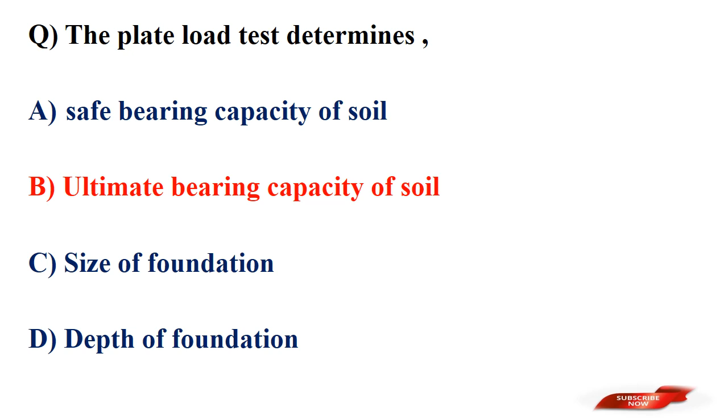Distance between two neighboring brass rings is. Options: less than 20 cm, 1 meter, 20 cm, 5 meter. Answer: option B, 1 meter.

The isometric axes are inclined at a dash degree to each other. Options: 150 degree, 120 degree, 90 degree, 60 degree. Answer: option B, 120 degree. The isometric axes are inclined at 120 degree to each other.

The difference between the most probable value of a quantity and its observed value is. Options: true error, residual error, safe error, conditional error. Answer: option B, residual error.

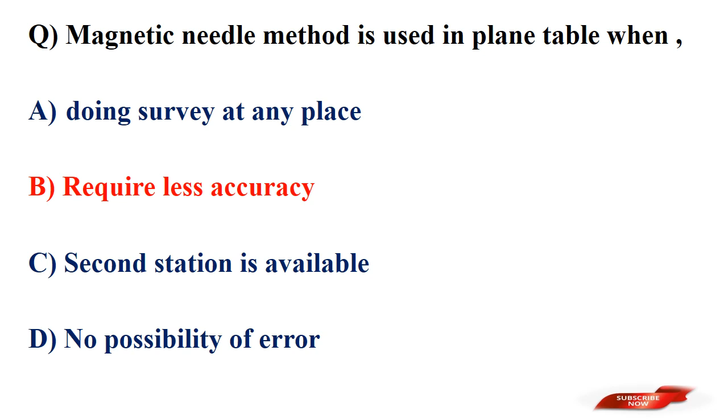Smallest division in the graduated scale of Vicat apparatus. Options: 1 mm, 2 mm, 3 mm, none of those. Answer: option A, 1 mm.

The box of prismatic compass is made of. Options: steel, brass, iron, aluminium. Answer: option B, brass.

Leveling across a river is done by. Options: fly leveling, reciprocal leveling, trigonometric leveling, cross leveling. Answer: option B, reciprocal leveling.

The accuracy of fix by 2-point problem is. Options: unique, not reliable, good, bad. Answer: option B, not reliable.

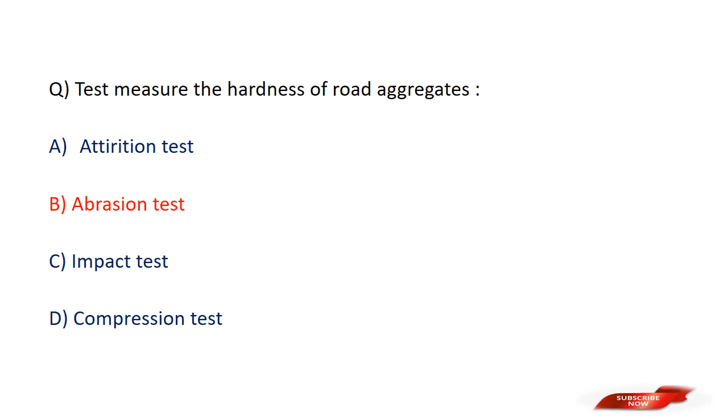Minimum width of stair for a single family. Options: 90 centimeter, 80 centimeter, 75 centimeter, 85 centimeter. Answer option C, 75 centimeter.

Minimum headroom provided for a stair is. Options: 2.7 meter, 2.1 meter, 2.6 meter, 1.8 meter. Answer option B, 2.1 meter.

Plinth should be at least dash centimeter higher than general road. Options: 30 centimeter, 45 centimeter, 50 centimeter, 65 centimeter. Answer option B, 45 centimeter. Plinth should be at least 45 centimeter higher than the general road.

The building plan is a section at the level. Options: foundation, sill, roof and plinth. Answer option B, sill.

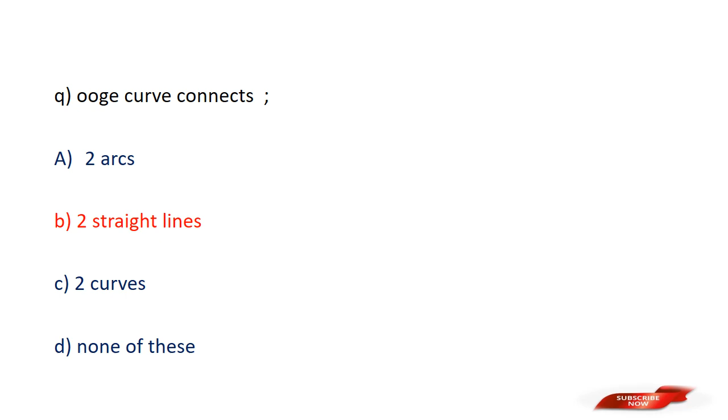Visual ray method. Options: general oblique, cabinet, oblique, perspective. Answer option D, perspective.

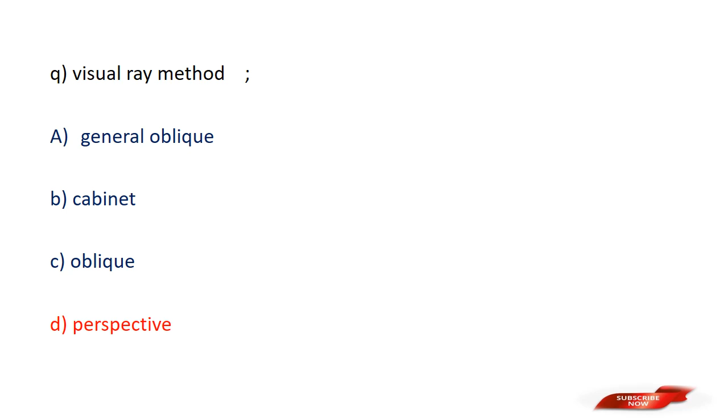Special publications of BIS for engineering drawing practice for students. Options SP25, SP45, SP46, SP65. Answer option C, SP46.

The portion of road surface which is used by vehicular traffic is known as. Options: shoulder, expressway, carriageway, none of those. Answer option C, carriageway.

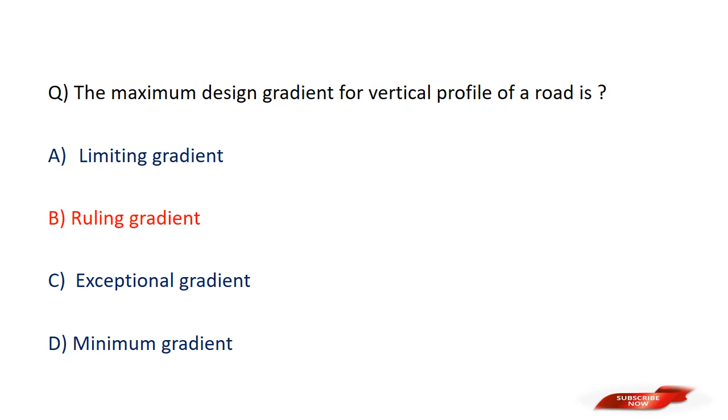Causeways are a type of. Options: side drains, cross drainage structure, jelly drains, subsurface drainage structure. Answer option B, cross drainage structure.

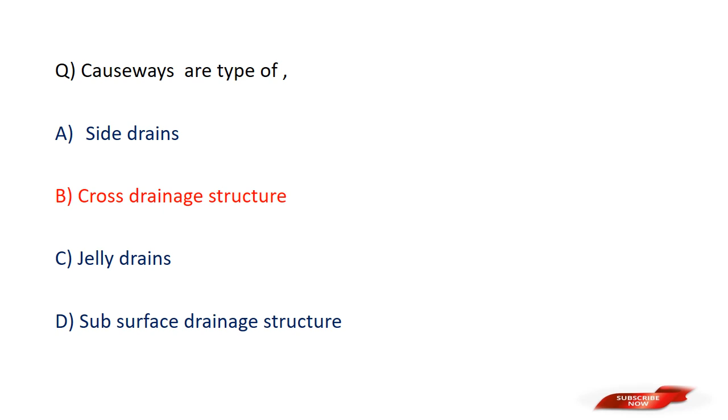Bituminous pavements are. Options: rigid pavement, semi-rigid pavement, semi-flexible pavement, flexible pavement. Answer option D, flexible pavement.

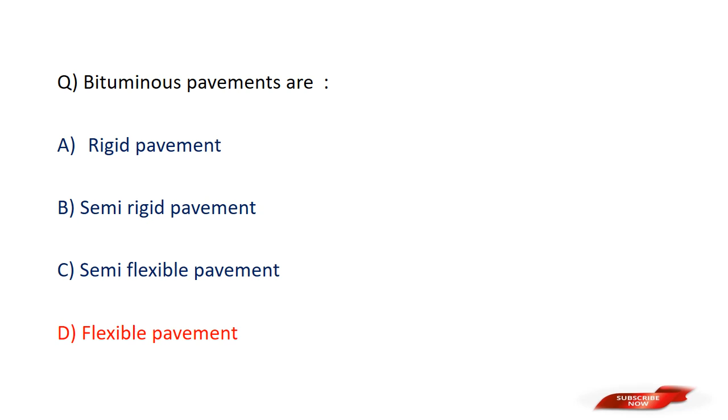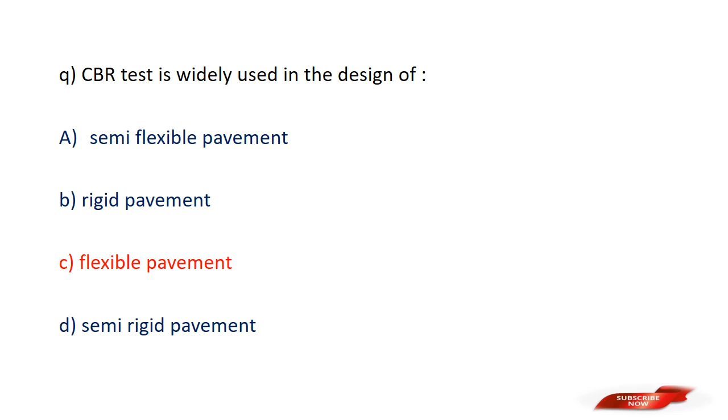CBR test is widely used in the design of. Options: semi-flexible pavement, rigid pavement, flexible pavement, semi-rigid pavement. Answer option C, flexible pavement.

The inner part of a road bent downward from the edge at the place with the curve or bend is. Options: camber, curve, subcrust, super elevation. Answer option D, super elevation.

Dash is used while determining the road alignment. Options: limiting gradient, ruling gradient, exceptional gradient, floating gradient. Answer option B, ruling gradient.

Maximum ruling gradient as per IRC. Options: 1 in 500, 1 in 100, 1 in 20, 1 in 30. Answer option D, 1 in 30.

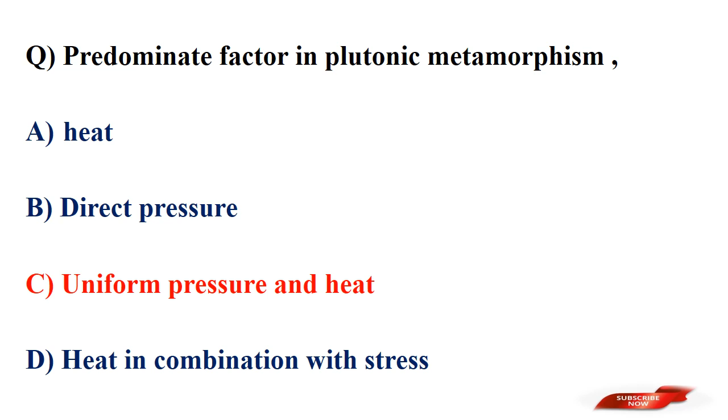Presence of soluble matter in a sample of stone found by options: water absorption test, Spire test, acid test, Smith test. Answer: option D, Smith test.

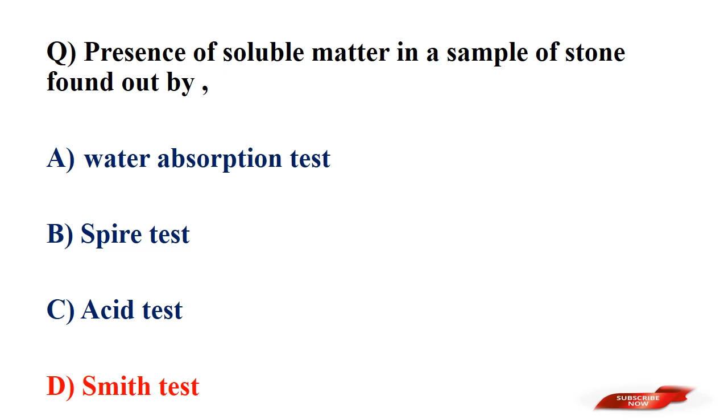Glass used for making prisms. Options: soda lime glass, potash lime glass, potash lead glass, common glass. Answer: option C, potash lead glass.

Dash glass is made using a mixture of potassium silicates and calcium silicates. Options: soft glass, bottle glass, flint glass, hard glass. Answer: option D, hard glass.

Hardness of stone is found out using options: impact machine, Dory machine, Deval machine, none of those. Answer: option B, Dory machine.